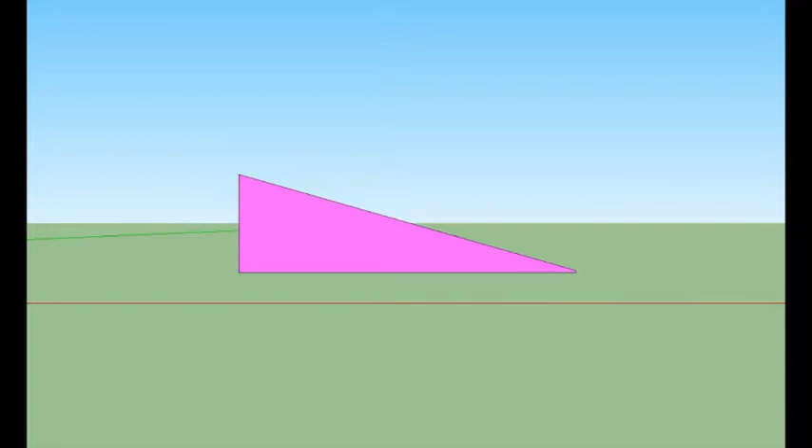Object number 3. Front view. Top view. Right side view.

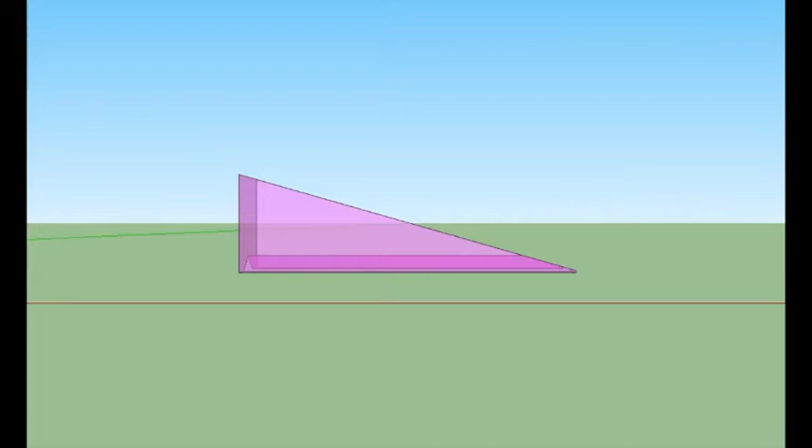Object number 3, see-through. Front view. Top view. Right side view.

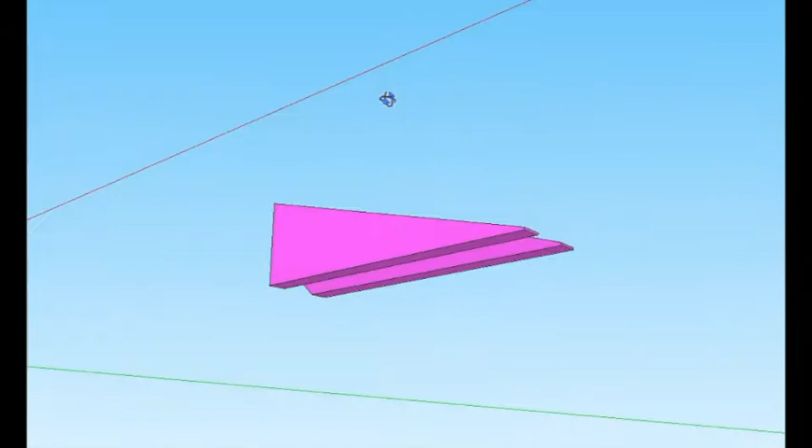Note on object number 3, there is a groove that runs all the way along the length of the bottom of the object. Object number 3.

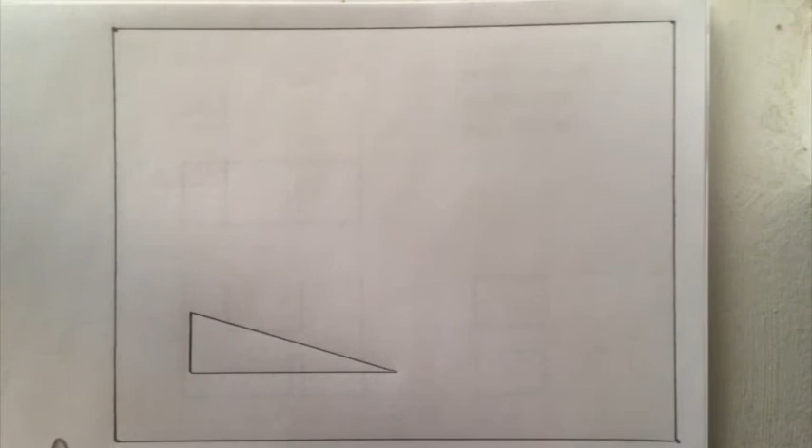So that is our wedge from side to side. That's how tall it is. And this is going to be the angle part from the back to the front, or left to right, I guess. Now, looking at that wedge closely, when you see it from different views, you notice that there is a groove that's cut all the way along the center of the bottom part.

Now again, that is part of the wedge that we cannot see in this view. So we're going to represent that cut that goes all the way across with a dotted line. And dotted lines represent things that we cannot see but we know are there. Alright, so on this view now we have some information that we can transfer from the front view to the top view.

So I'm going to start with my projection lines, and as always, they're nice and light. Try and keep them perpendicular to the bottom of my page, straight up and down. I also need to bring this point right here, because when I'm looking at the top of this wedge, this is where this groove becomes visible. And it looks like a little triangle peeking out at us. So I'm going to draw another projection line right there.

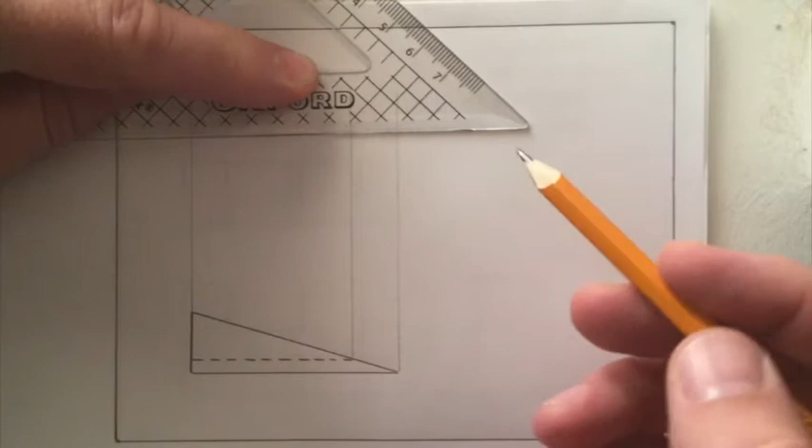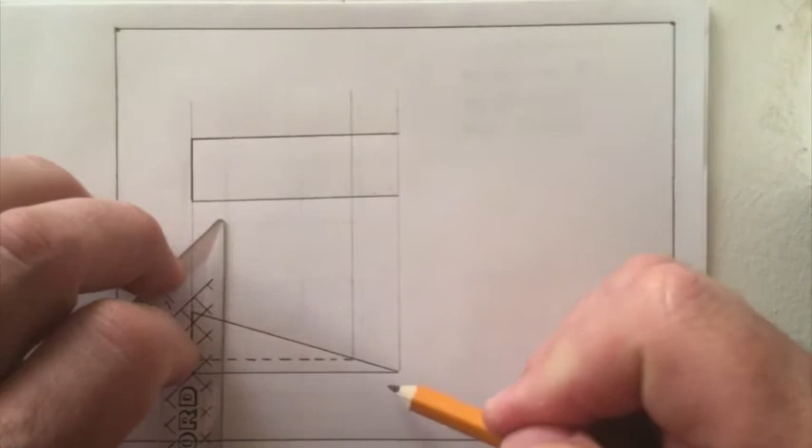So now, time for my top view. And again, the depth of this object is about the same as the height. It's pretty close. So I'm going to draw my front and back of the object about that far apart. I'm going to use a solid line to represent the left edge. And even though the right side is a lot thinner, it's still there from front to back. So I'm going to draw a line there too.

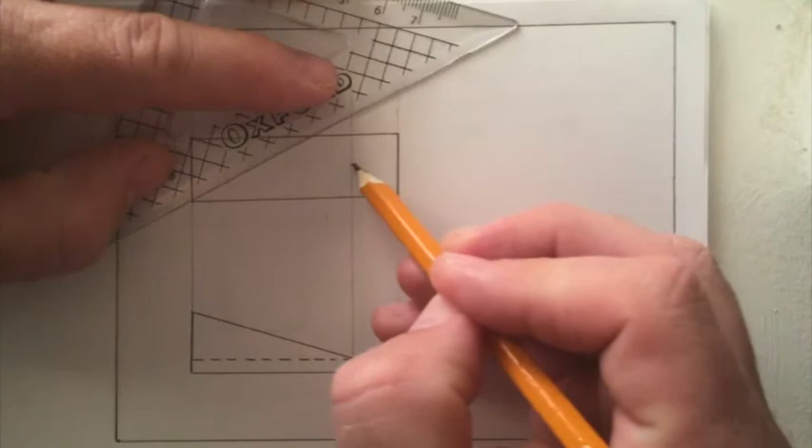Now, this line coming up here, as I said previously, is where this groove that runs all the way through breaks through, and we can see it from the top view. So I'm going to place a dot right in the center, and I'm going to draw a line going from there to there, and a line. This distance here should be about the same as this distance down here, so I'm going to just eyeball that and take a guess and do that.

So there now we have what is, for the most part, an almost fully completed top view. Now I know that that piece of wood is not actually there, so I'm going to erase it, and I am going to draw more hidden lines across here. Because we know that this feature runs all the way through, just because we're looking at it from a different view does not mean that it goes away. So I need to put dotted lines down there.

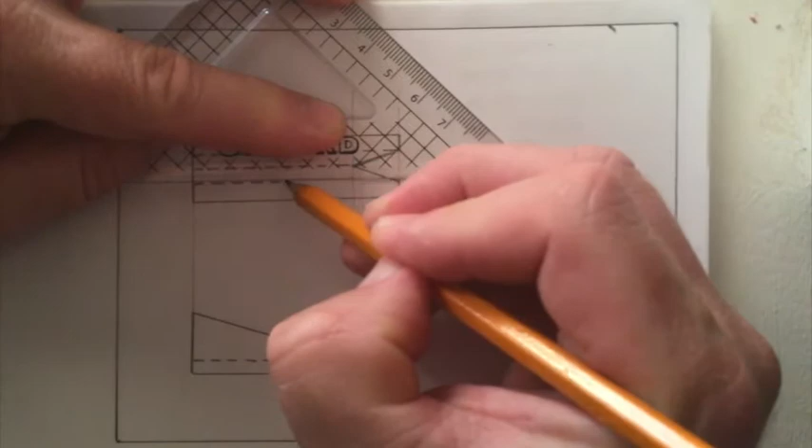And I'm going to do a dotted line here also, because this groove is almost cut like a triangle. There's two edges, edge, edge, and there's a peak. So I'm going to fill that in. There we go. So this is the top view. We see left to right, front to back, and we have our groove cut all the way through there.

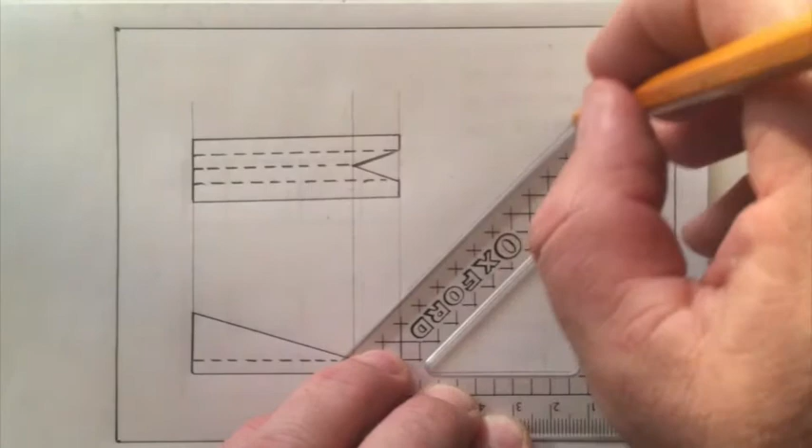So now it's time for our 45-degree line. And notice when I'm drawing these objects, I'm always doing them in the same sequence. I start with the front view, I draw projection lines, I do my top view, I do my 45, I run projection lines, I drop the projection lines, and then I complete my right side view.

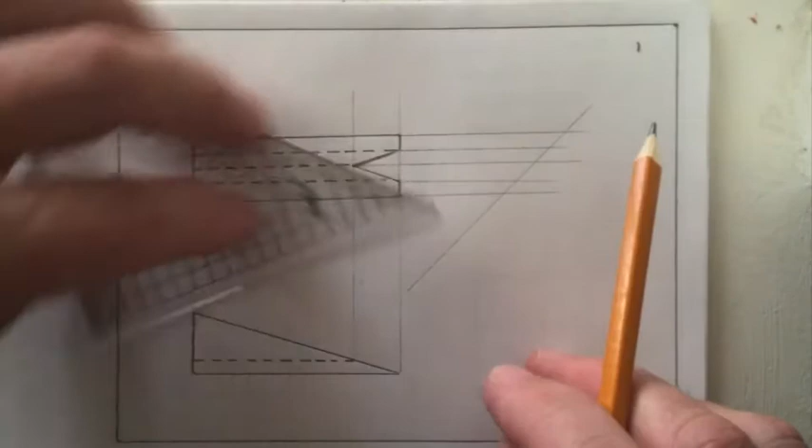So, projection line time, nice and light, and a projection line from every feature. So that means there's going to be 5 of them running across here. Now the challenge here is to keep them going nice and parallel because they tend to go up and down and left and right. And then I'm going to draw some projection lines here. So from the height of my object, and from the base of my object, and from the height of that groove, because that information has to come over here also. All right, so projection lines are all done.

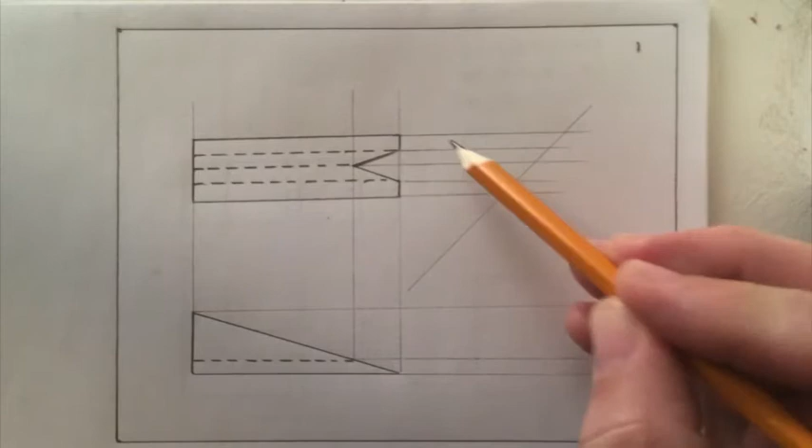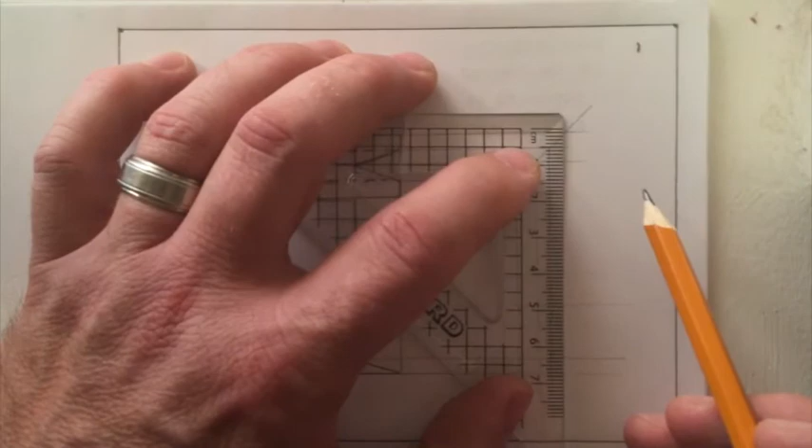We find our intersection points between our projection lines and our 45 degree, and we drop those straight down. And again, this here is also a little bit of a challenge to keep these running perfectly straight. And again, these are projection lines also, so do not do these really dark. And there is my back edge. Okay, so now we have everything we need here to complete our object.

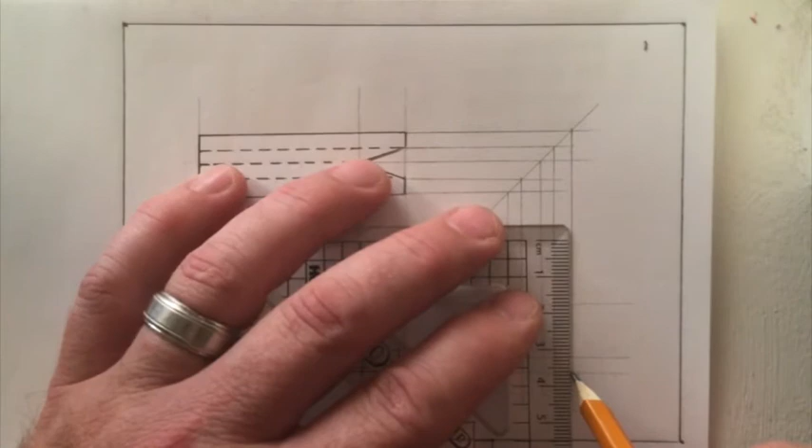So as we're looking at the right side view, we're looking at the object from here, and it is that tall. And I've got my full height here, so I'll do that on both sides. There's my full height. My object is flat across the top. There we go. And this groove is centered. So this is the center of the groove. So I come over and I come down.

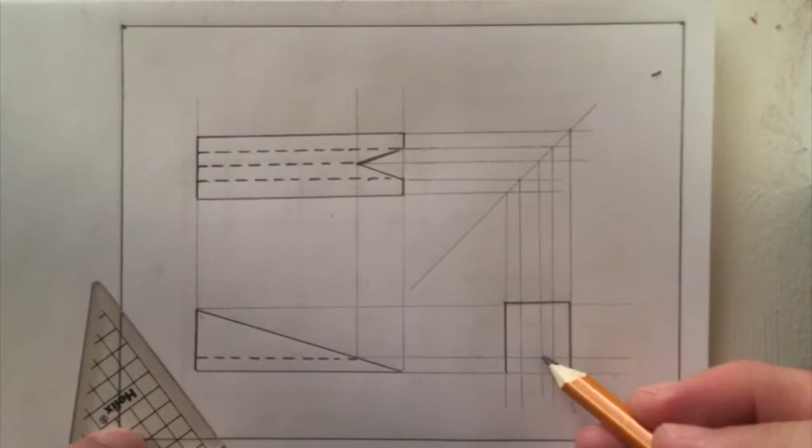So the center of the groove is right here, but it tells me it's this high. So this point right here is the top middle peak of my groove. So I'm going to draw a line from there, and a line from there, and then I'll use my ruler just to finish off there and there. So there's no hidden features on this view because I can see that groove cut all the way through.

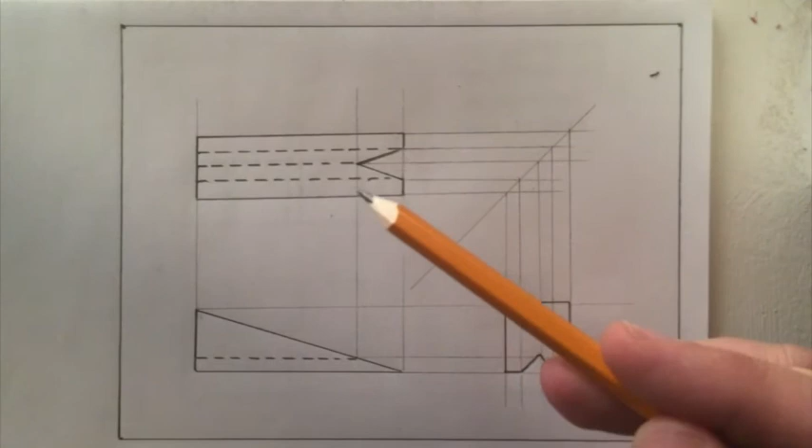Notice the groove is the same height here. Notice my groove becomes visible right here, and notice that these 3 points all come over, hit my 45, drop down, and they are these 3 points right here. So all of these features that you have on your shapes need to match up with the corresponding feature on the other views of the same shape.

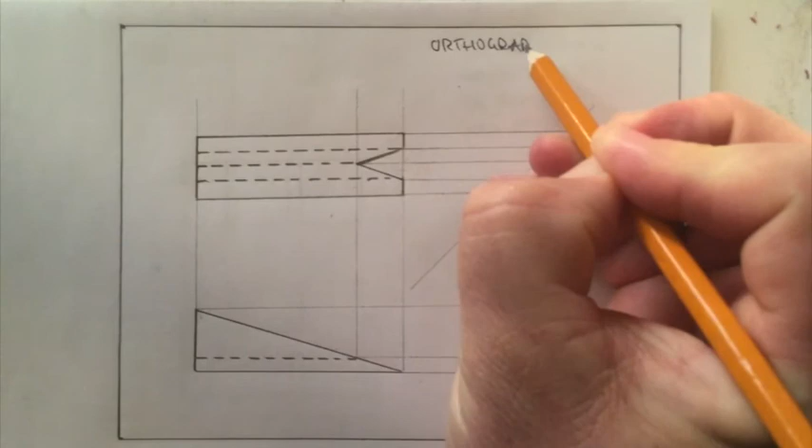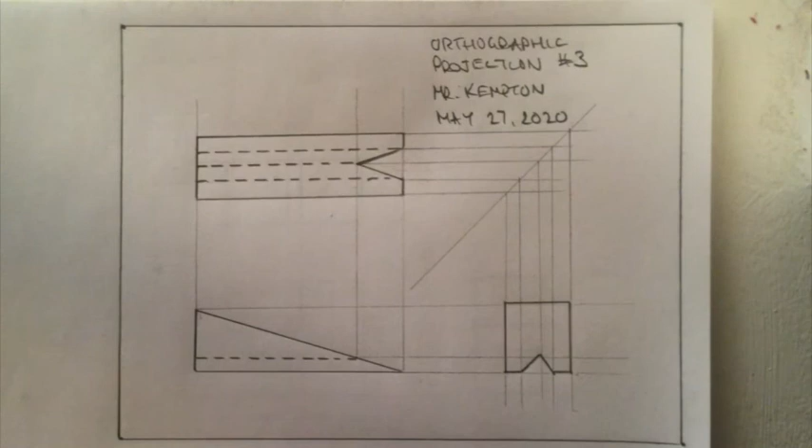All right, so the last thing I need to do now is add my title. Orthographic projection number 3. And again, that one's done by Mr. Kempton. And today is still May 27th, 2020. And voila, there is orthographic projection number 3.